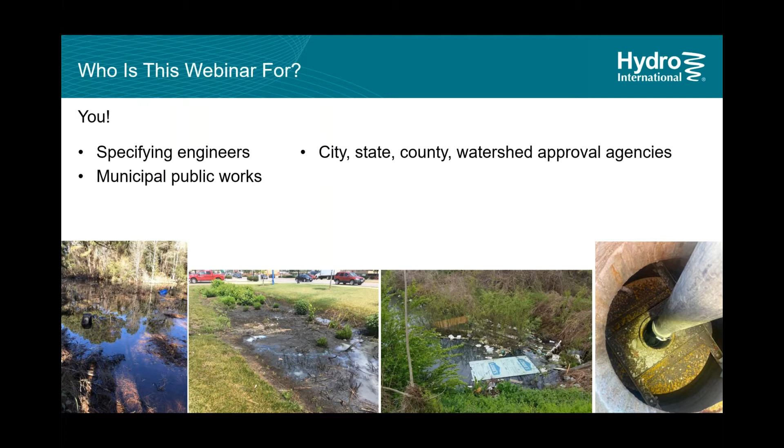So, who is this webinar for? You. If you've registered for this, this is for you. This is really a webinar intended for everyone, but more specifically, I think the people who will find the most value from this are specifying engineers, municipal public works folks, city, state, county, watershed approval agencies, or local engineers, but also business and property owners or managers could find some value out of this.

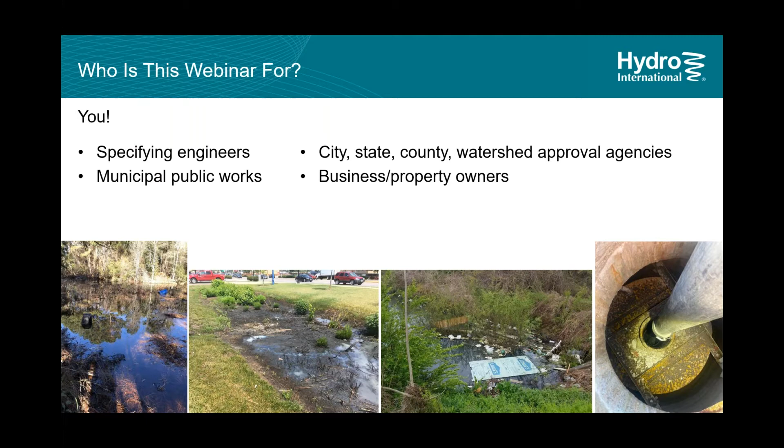And what I'm going to do here throughout the slides is show some photos of failed BMPs. So you can see here some ponds, bioretention, stormwater separator. Not all systems are failed, but since we see these things every day, I just want to share with you what we see out in the field, so you can get an idea of how these systems can end up looking if neglected. So those will be scattered throughout.

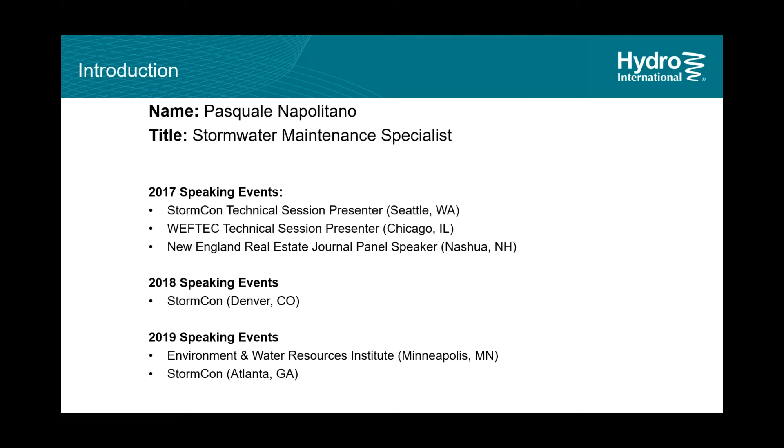As I mentioned, my name is Pasquale Napolitano. I've done a variation of a maintenance webinar probably for the last 5 years now. I've done some papers that also deviate off some of those main points in terms of where stormwater's headed or how things are looking within the compliance or inspection maintenance side of the stormwater industry. So if you've attended one of those sessions before, I'm going to try to change things up a little bit more this time. I want to keep things even more visual than usual. I feel we've all been cooped up for quite a while now, so I did want to keep things a little bit more visual in that sense. So you should see some new things, but also I'll be touching on some other key points from before.

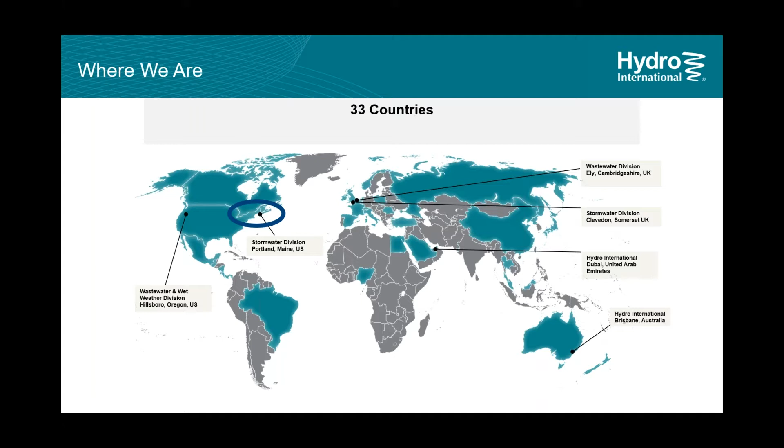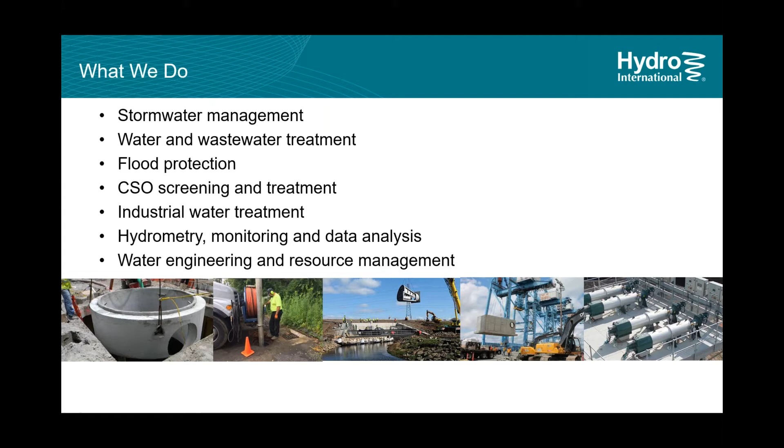As far as where we are, again, Hydro International, as the name suggests, is an international company. I'm in the Portland, Maine office. That's our stormwater headquarters for North America. We have folks all over the country, the continent, of course. What do we do? Real quick, if it's related to water, we do it. Wastewater, stormwater, CSO, pretty much everything industrial water, either on the process water side or surface water side, flood management.

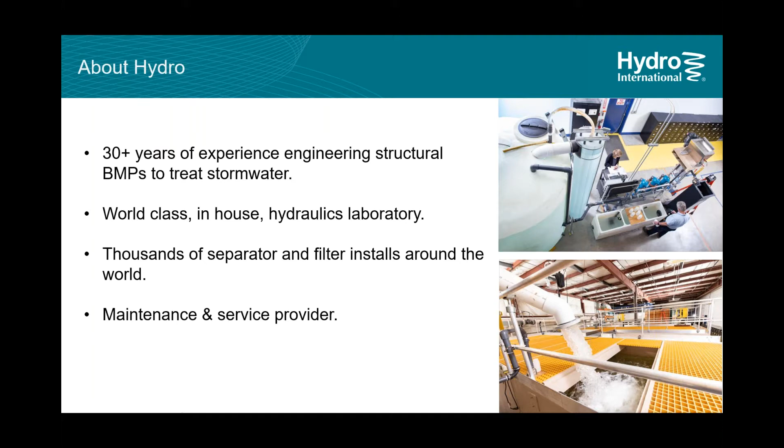Specific to the Portland office or America's stormwater, it's been around for about 30 plus years. We manufacture BMPs. We have an in-house lab where we do testing of that. We have thousands of separators and filters installed across the world. And again, a maintenance and service provider. So we not only develop, engineer and manufacture treatment and proprietary products in-house, we test them in-house. We also have them installed all over, and we also service these afterwards. So we're uniquely positioned in the sense that we're working with regulators, specifying engineers, contractors, business owners, all the players involved in a stormwater BMP's life.

So why are we talking about maintenance? Well, the truth is, and I don't think this is a surprise to anyone, the majority of stormwater BMPs don't receive routine inspection or maintenance. Leaning on the fact that we're a manufacturer, we can look at our own records, specifically for filters, because filters need to be replaced every so often, and we can see how often that is happening based on the installation base. It's less than 20% probably doing this regularly.

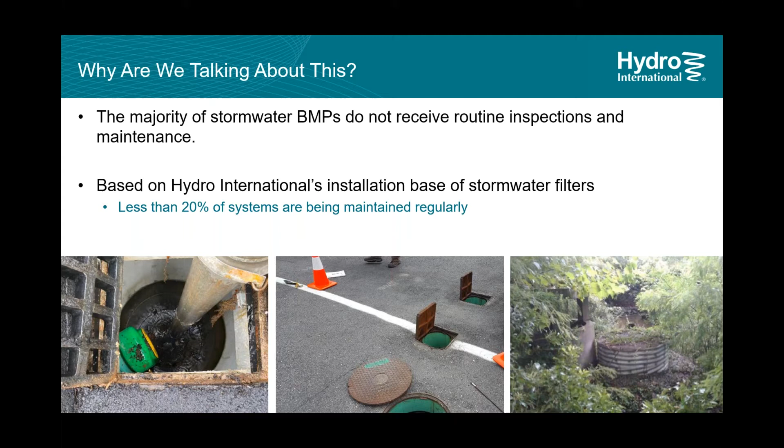I will say that over a 5-year period, that 20% wasn't always 20%, it was lower than that before. As much as I'd like to pat myself on the back for that, it's not necessarily the case. I think the industry as a whole has been moving towards this. In some of the later slides, I intend to show you what I see as some of the driving factors for awareness and gaining more compliance for stormwater inspections and maintenance. But again, 20% doesn't really cut it. We need more than that.

What's the result of having little to no compliance? Well, if stormwater BMPs are not inspected and maintained, the structures fail. It's really that simple. And again, some photos here included, a bioinfiltration system. You have some catch basins that are completely covered. You can't tell that they're there, or what's in there. And one of them has 7 feet of debris. This is not great. Not inspecting means that things go unnoticed.

So if you imagine all the work that goes into, if you are a municipal engineer, approving projects, if you're a specifying engineer, putting in the soil and erosion control measures, specifying the product for the treatment that's needed for the site, all that work, 12, 24 months later, if no one's doing anything, it's like there was nothing there, or worse, things can kind of get out of control.

So it's really important that best management practices are seen as an ongoing thing. These are not something that just gets installed and then it's done its job and you move on. Really, stormwater BMPs need to be something that's constantly being checked on and worked on.

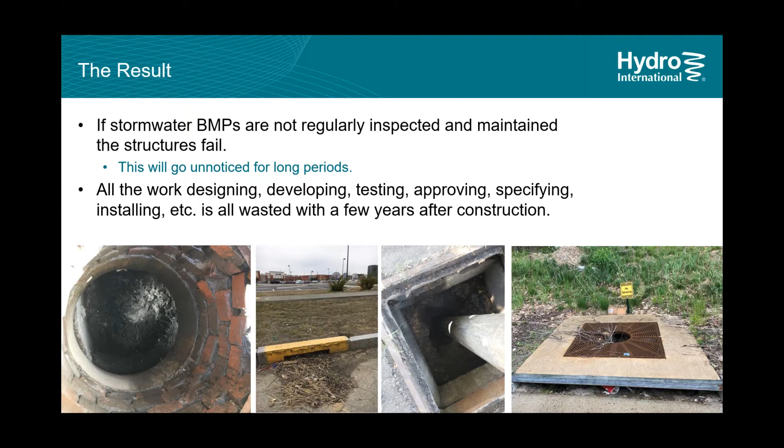Why does this happen? I've done a whole paper on this, so I won't touch on it a bunch here, but the gist of it is that there's a lot of players involved. Again, there's specifying engineers, there's approval agencies, and there are contractors, subcontractors, manufacturers involved. And in the end, maybe a developer sells the property, leases the property, properties change hands. It very quickly turns into a bad game of telephone.

And so basically the lack of awareness, and I guess lack of regulatory enforcement is unfair, but just the sense that a lot of emphasis gets put on permitting for new construction. And the same emphasis or resources aren't given often for the back end of that, which is sort of the regulatory enforcement to ensure that these systems are being maintained afterwards. But again, that big factor is communication.

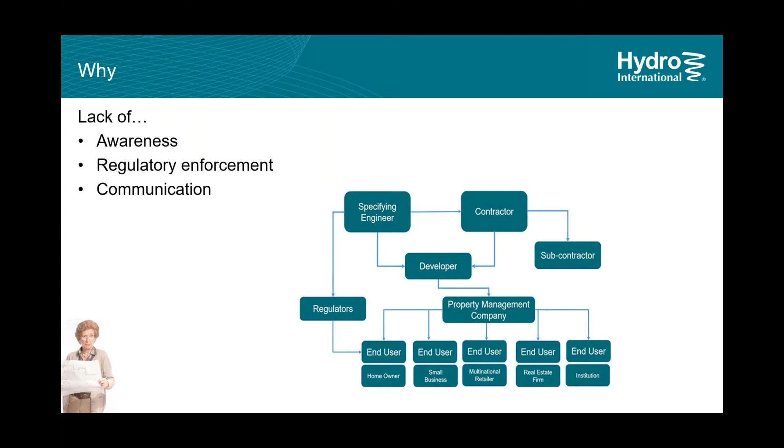And I put the little old lady here with the plans because it's funny, but it's true. I mean, I spent almost my entire morning this morning talking to homeowners and people who represented large box stores who didn't know they had something, trying to get it fixed. So it's very common for people not to know what's going on or to know how it happened or that they had anything.

To make matters worse, again, maybe a little bit harsh, but the EPA obviously has its regulations and they're vague, but not vague in a bad way. It's there to be interpreted so that local communities can then interpret how they need to. Rainfall in Nevada is not the same as rainfall in Florida. So it is intentional to an extent that there's room for interpretation how these should be implemented in various areas.

So that's not necessarily a bad thing in and of itself, but as this gets passed along, this all gets interpreted differently and people are taking different ways on how to do these; different Phase 2 municipalities are handling things differently. And so it can get really confusing and some things work and some things don't. And that sort of confusion just kind of perpetuates this issue of people not knowing what's going on, or the end user or property owner knowing what to do.

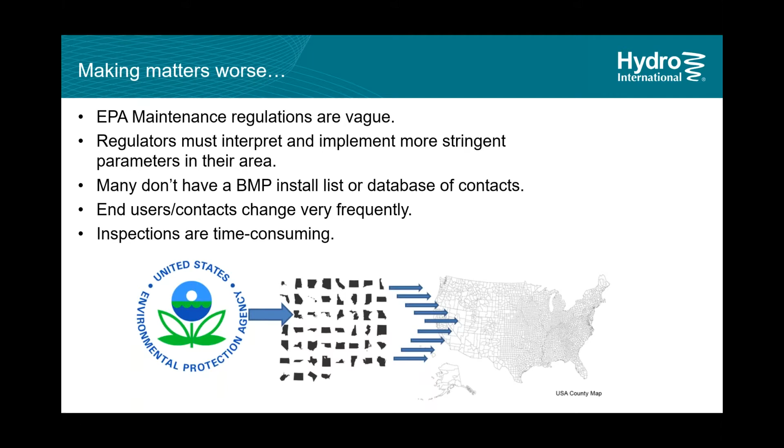Now, the rest of the presentation, as I mentioned, I wanted to be pretty visual about a lot of this. So I want to show you case studies of BMP maintenance in practice. And before I get into that, we do have a poll for the webinar that I wanted to run. I was just curious to see, out of the attendees, have you witnessed stormwater servicing or maintenance in person? It can be paving stones or catch basins or underground filter vaults or something as simple as bioretention or swales being mowed or trimmed. But we want to know, is this something that you've seen before or is it something that you don't get that hands-on with? So I'm going to attempt to run a poll here.

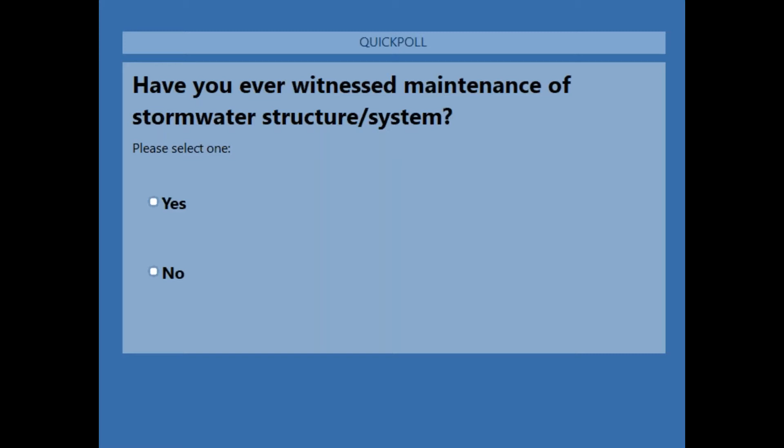Bear with me while I get it to start. So I'll just give everyone a little bit of time here to vote. Just give everyone a few more seconds. All right, let me see here. So I'll see if I can share the results with all of you.

So it looks like pretty evenly split. About 3/4 of everyone voted. More folks than not say that they have witnessed stormwater maintenance, which is good to hear because, again, stormwater BMPs can be a whole array of things. So it is good to hear that something as simple can be seen. Maybe not everyone's seen full-on confined space entry, underground filtration services, but if you've seen something, it's certainly better than nothing. So I'll close the poll now, and I'll jump through some of these case studies and really just walk through what happens. All right.

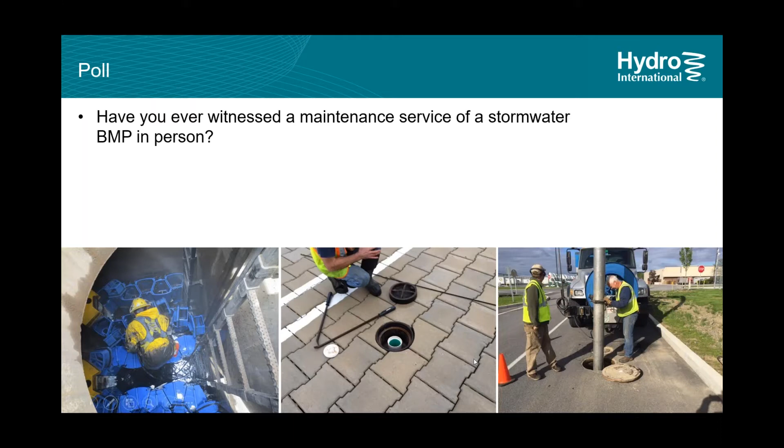So here we're going to get into maintenance case studies. Some photos here, just sort of your standard catch basin cleanings, some with more material than others. Typically, you're going to find sediment, dirt, sand, grit. You will find maybe dissolved organics, leaves, grass clippings, things like that. Trash. Those are the normal things you can expect to find, depending on the site use.

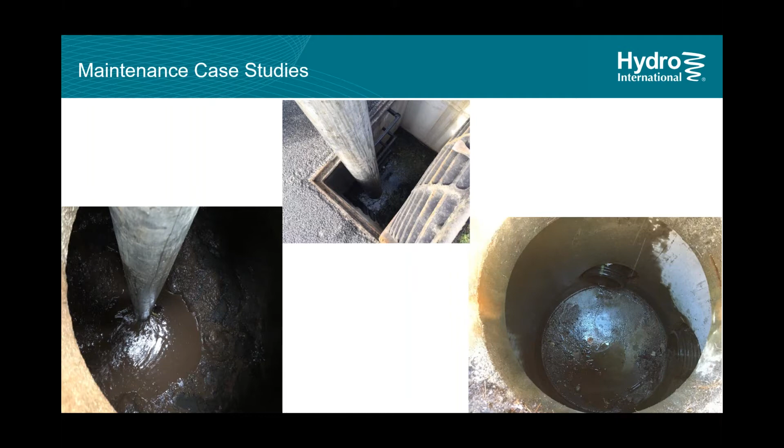If there's fueling, you may find some gasoline sheen, diesel, things like that, or you may find worse things. What I want to do, though, is take the more common stormwater BMPs, a little bit of gray, a little bit of green, some proprietary systems, taking examples from across the country, from Hawaii to New York, and just sort of give a range of what we typically see when we're doing something, and just walk you through it.

So maybe you have seen corrugated metal pipe detention cleanings. You've been on site for a CMP cleaning, but maybe you haven't actually been inside the chambers or in the rows and seen what happens. So that's what I want to show you. Again, you get your dirt, your silt, your trash, and leaves or mulch can get in there. And again, construction debris is a huge one.

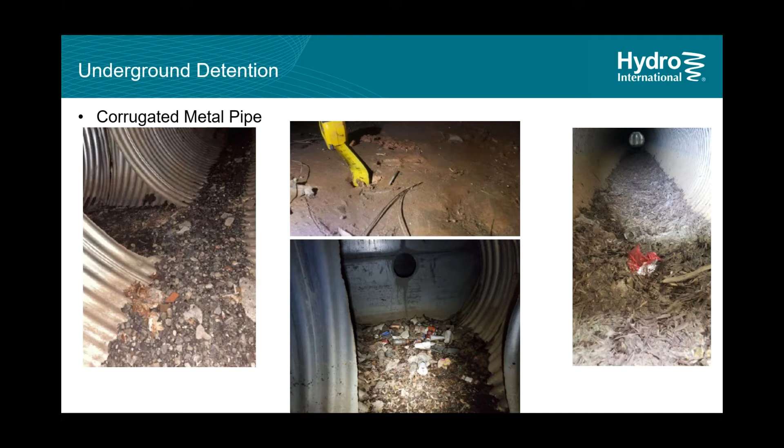Sites that have not the best erosion control measures, a lot of the stuff can get into the chambers and stay there. In the top photo there, you can see about 7 inches of silt in the CMP detention. So, how do we clean this? Well, you install maintenance manholes. Sometimes they're at a manifold at the end. Sometimes they're in the center to get down in there and clean them.

But what's important to note about actually maintaining underground detention, and it's not unique to CMP detention, is that it takes a lot of work. There's a good amount of manual labor in terms of pushing and shoveling material to where there's a maintenance access, then flushing and pumping, and doing a combination of power washing and pumping to get the material out. So it can be labor intensive. It can be time intensive as well.

But as you can see from the photos, these systems obviously can be cleaned. They work very well for what they get installed for. So they're great devices, but you just need to be cognizant of the fact that when these need to be cleaned, it costs money. And that's probably the biggest thing I encounter when speaking with property owners: it's not even on their radar. It's not on their budget that this is something they have to do.

And to explain that this needs to happen, and will need to happen in routine intervals, is something that if, as a stormwater community, we can get in front of, I think it helps compliance along.

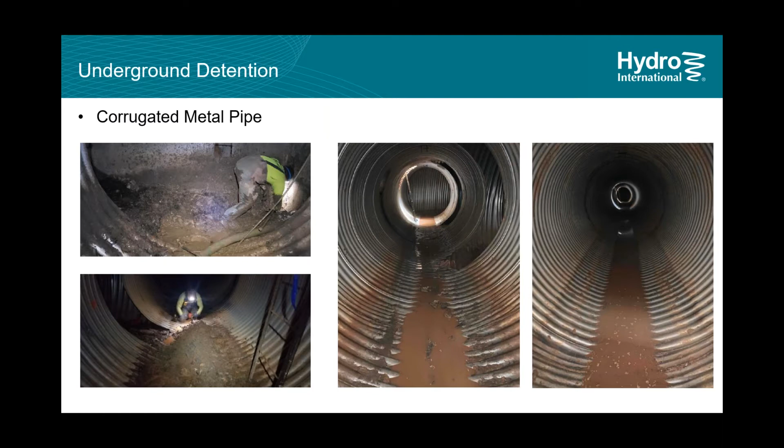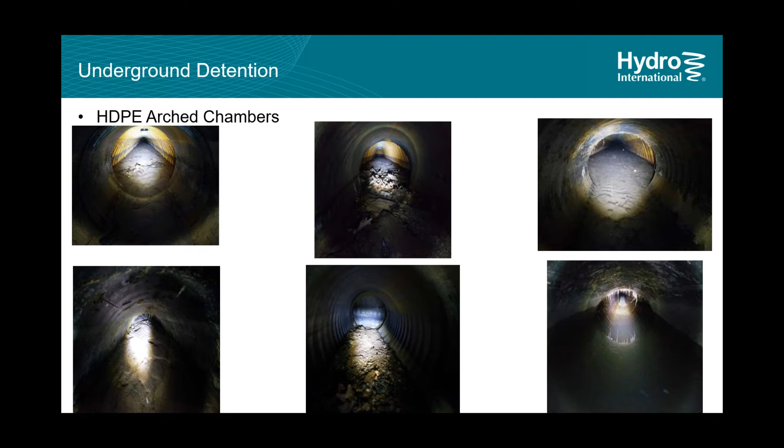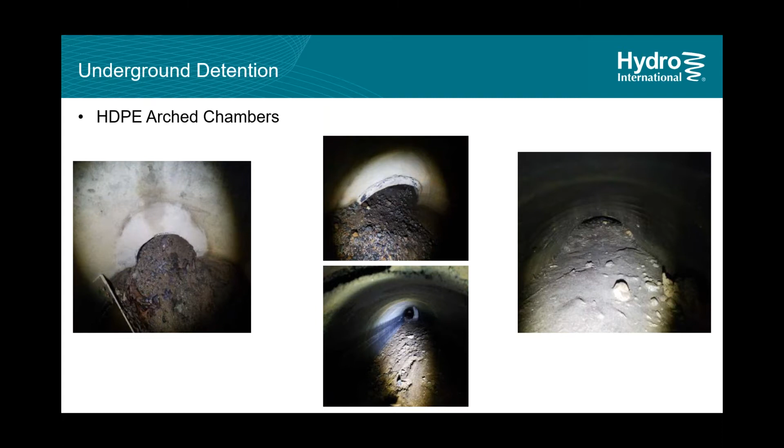Just a couple more examples of the same device that I just showed, those same rows. These are the access manholes, or some of them, that we had to get down into to see down the rows. And you can see they're just completely filled with material. So obviously the system's at this point failing or near failing.

But once you've jetted it and once you flush and you pump everything out, they're clean and they're operating again, and things are fine. So again, this is a common form of underground detention. It can certainly be cleaned, but you don't ever want to let it get as bad as the photos I just showed you.

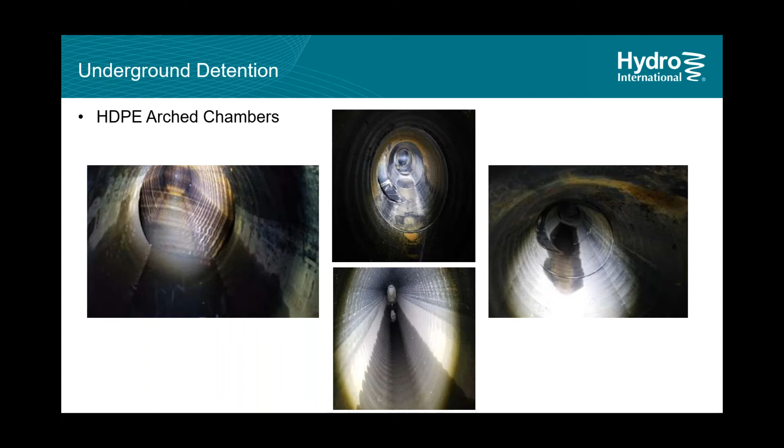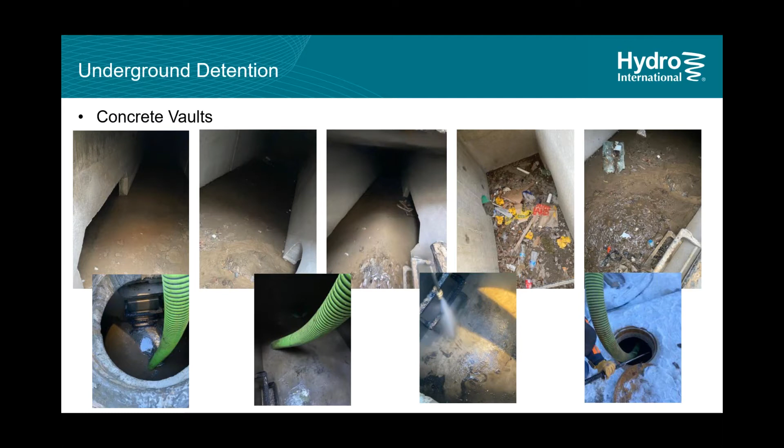But this is just to show you, your vacuum truck, power wash. If you need it, you can enter. If you don't need to, you can get it cleaned and have the system operating as it should.

I think in terms of proprietary devices, stormwater separators, hydrodynamic separators are probably some of the more popular ones. Certainly within the last 20 years, probably the most popular. You see some other devices now and approaches coming on the market, but these are the ones you see quite a bit by sheer volume of what's out there for stormwater BMPs. I would say stormwater separators, hydrodynamic separators are it.

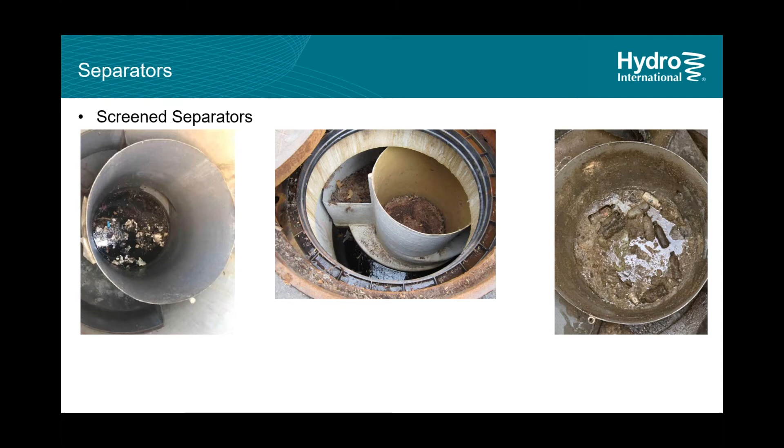These are some examples of some proprietary screened separators. See, they're doing the job, capturing leaves, trash. One example there has obviously been contaminated with cooking grease, not what it's intended for. But the key to point out is for any type of screened proprietary device, not necessarily particularly this one, but all of them, if you're not cleaning them or inspecting them often, those screens will blind. So though the screens are great, they're helping, if you're not looking at these, they will blind, and then the whole thing won't work.

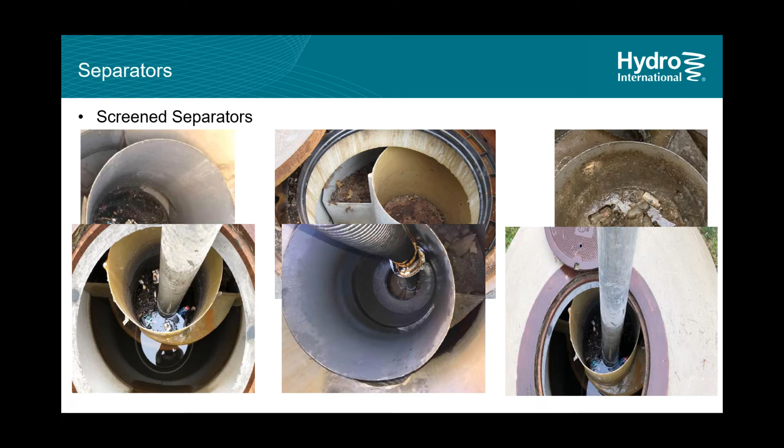Again, your vacuum truck, either a flexible hose or the standard size aluminum boom that comes down, you can clean these devices out and have them operating back to the way they should be. And again, just based on how many of these are installed, these are one of the more common things. So if you've seen a vacuum truck pumping, it's probably pumping a catch basin or a stormwater separator.

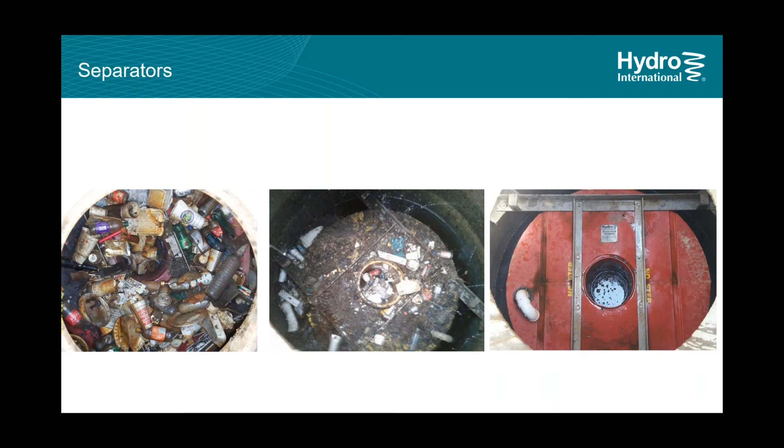Here's another model. This is a model that Hydro International manufactures. This is a Downstream Defender. We've been making this for some 30 years. And again, it's doing its job. Looks filthy. It's good because it's there and it's not downstream. Oils, trash, organic debris. They get into the system, and you need to get it out. Ideally, you never see it get this bad, though, right? So, yes, it's doing its job, but you want to avoid things getting to this point.

How do you clean it? It's really simple. Again, the vacuum truck, you drop down the standard size aluminum booms that go down, clean out the sump, clean out the floatable area. The structure is good to go.

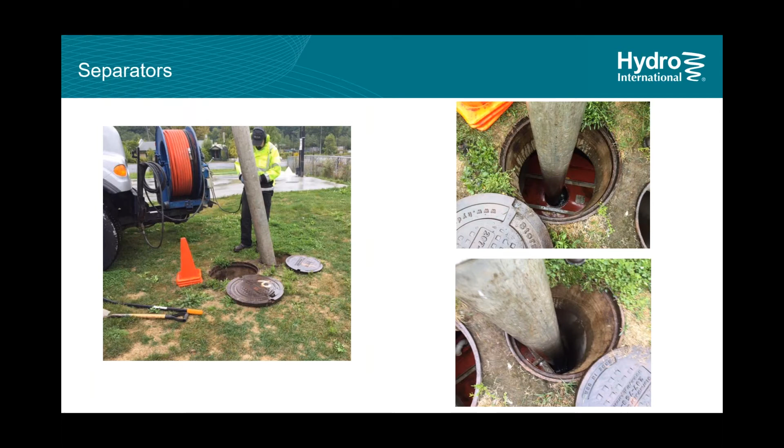A lot of stormwater separators kind of come in those standard precast manhole sizes, your 4, 6, 8, 10-foot diameters, even 12. More common in the last 5 or so years, you're starting to see 3, 5-foot variations of this. But round structures, separator inside it, these trucks can go and clean these out. For anyone who's used to doing this, it can be like clockwork.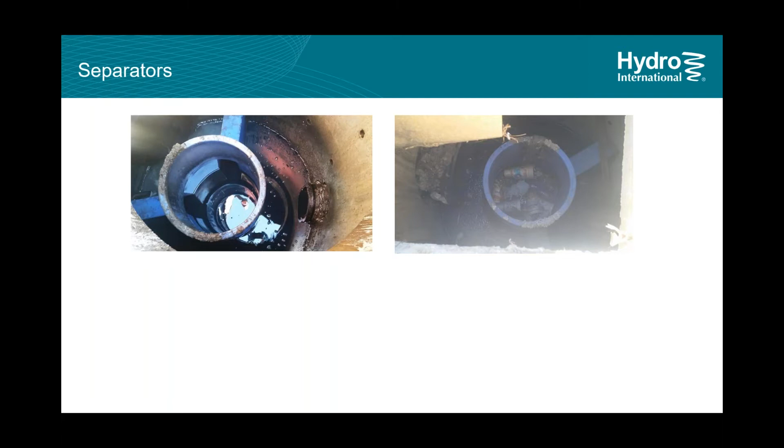And here's another model. This is a different model. Again, this is a Hydro International model. This is the First Defense, but the same idea. Here you have oil coming in, being trapped, not hitting the outfall, the outlet of the structure. Another example with trash inside there.

Same thing. Bring the truck, drop the boom, clean it out. What I will mention as well, universal to all stormwater separators, is just because you don't have a lot of, say, material on the sump floor doesn't mean you shouldn't clean it every so often, because by not cleaning it, a lot of that silt and dirt can get stuck there. You can almost create a false sump where you're starting to lose your storage volume because it's really hard to get out. So that's where the PSI power washer is really helpful in breaking that material out.

If you have a structure that's 18 feet down, that changes things. You can get a wand extension to help get down there, but in some cases, for some types of separators, you may have to enter it. And ideally, you never have to enter a separator. So preventative maintenance is way better than waiting until something gets completely full or 75% full, and then you're finding that it's very tricky to get the material out.

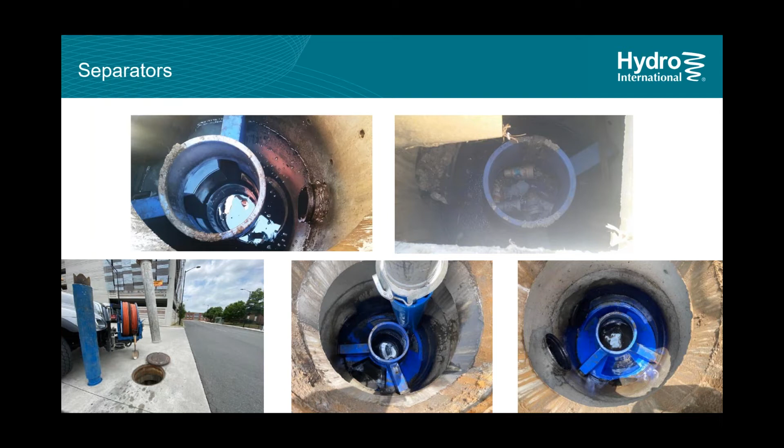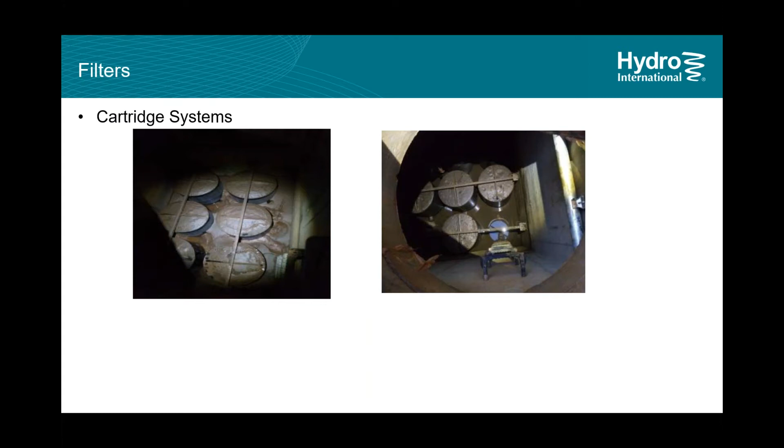Now I want to shift over to the other popular stormwater water quality option out there, which is filter systems. The first examples I'll give are cartridge systems, again with several variations of cartridge filters out in the market, doing different things depending on how they're designed. You can see the examples here. Obviously, they're ready for service. How do you service? Same way, you're going to power wash to get the material off. You're going to de-water, pump that out, dispose of it.

What's not shown in here, though, is the confined space entry that's involved to then undo the carts, have them hoisted mechanically out of the manhole, put new carts in. That's another side to filters that sometimes can get lost on the owners when it's being communicated, which is confined space entry. You need to purchase new replacements periodically, and it takes more people. Obviously, with confined space entry, you need an attendant, extra folks there. You need to enter in, it takes more time. So there are more costs associated with the filter just by nature of what it is.

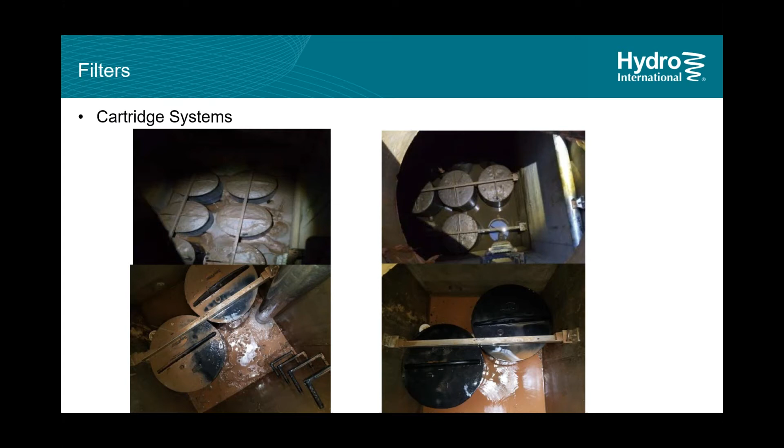But filters, by nature of what they are, can sometimes do a little bit more than what a separator can. So again, depending on what you need to use, filters are great. It's just setting the expectation with owners as to what this is after.

Here's a different model of cartridge filter. Similar idea, cleaning out the vaulted structure, the precast structure, getting the carts removed, vacuuming out the material right from the carts, power washing the carts off, exchanging the carts to be refurbished, and getting new carts on site. Same thing though, needing mechanical assistance to help lower and raise the carts in and out of the chamber. That's part of what's involved in this.

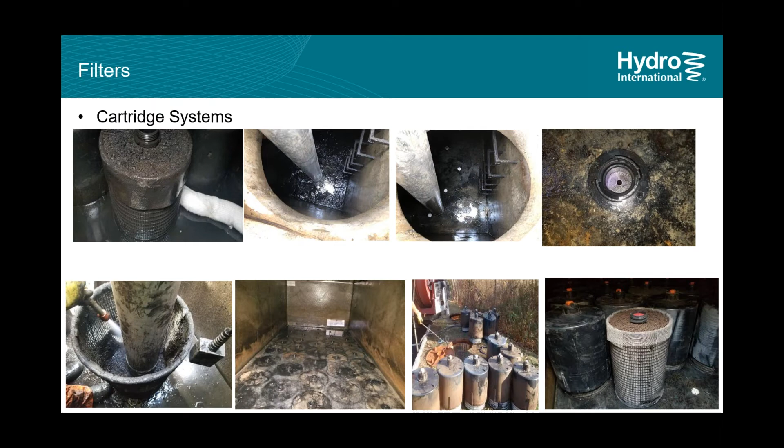Needing to coordinate, when are our new carts arriving? Are we going to have the carts out above grade, ready to take off and to put in? If it's a large mall, you have the space to do this. That's great. If it's not a large property, do we have space to have a bunch of carts out in the parking lot while we're doing this? So these are sorts of things you may want to consider. But again, here's the process to clean them. You power wash, vacuum, get inside, hoist things out, get things back in.

More recently, there's been a lot of membrane filters on the market. I'll just touch on one model here. There are several. Similarly, you're going to start to see the theme here. The vacuum truck will suck out the water and sediment. You'll need to power wash the inside. There are some different variations depending on the manufacturer as to how to best service a membrane filter. Some will suggest removing them from their housings, power washing them off, and putting them back in.

But ask questions: how feasible is that, or how long can you expect that to maintain? The power washer can be pretty powerful. Do you damage the filter from that, or what's the lifespan after you've done that a few times? Those are the sorts of questions you may want to ask. If you're doing it within the chamber, that means you're sending someone down into the structure. That's confined space entry. If you're bringing them above grade to do that, you still need to get someone down there to pull them above grade. And then if you're power washing it up on the surface, where's that water going? That's another thing you need to be concerned with.

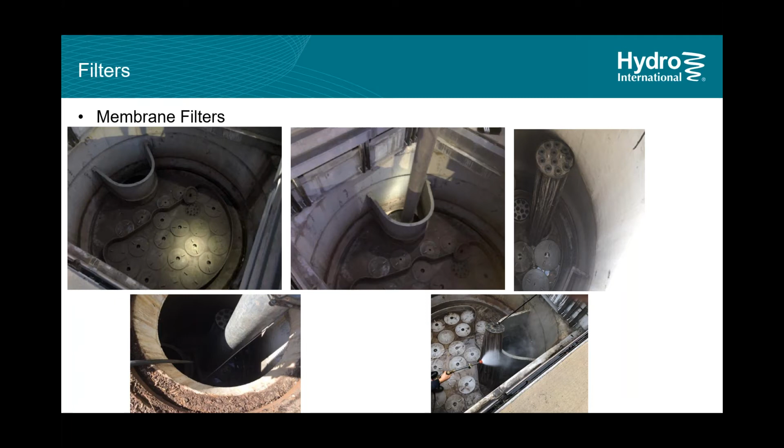And then of course, when the time is ready, changing the filters themselves out. So membrane filters, a variation on stormwater filtration, with some different things involved with them. They can be cleaned by anyone who knows what they're doing in that regard, but just be aware that there's a little bit more to it, or it's a little bit different than a cartridge filter or some other types of filters.

And the last example for a filter I'll give is media-based filters. These are Up-Flo Filters, Hydro International, and these are ones where a single person can hold these bags, take out the spent media, bring them above grade, and put new bags down into the structure. This is an example that's pretty versatile because it can fit into a 4-foot round manhole, but there are also variations of large vaulted structures similar to the other types I just showed you.

So same thing, you need someone down in there, you need to pump out, you need to power wash. The nice thing about this, similar to some of those carts, is that you can just vacuum up the material after. It's not hazardous, of course, provided there hasn't been a spill or something on site, so easy cleanup and being able to get in there. It's just a different animal from a cart filter. Again, you don't need that mechanical assistance. You do still need the vacuum truck with the power washer on it.

That hasn't changed. Provided the system isn't incredibly shallow, you are still going to need to have some confined space entry to some extent. So that's filters in general: confined space entry, vacuum truck, replacement filters. Those are things to keep in mind when you're looking at these. If you own them yourself, if you're a municipality, if you're a specifying engineer looking to install these for an owner, ask the questions: when does this need to be changed? How much does it cost? And how frequently should we be inspecting these?

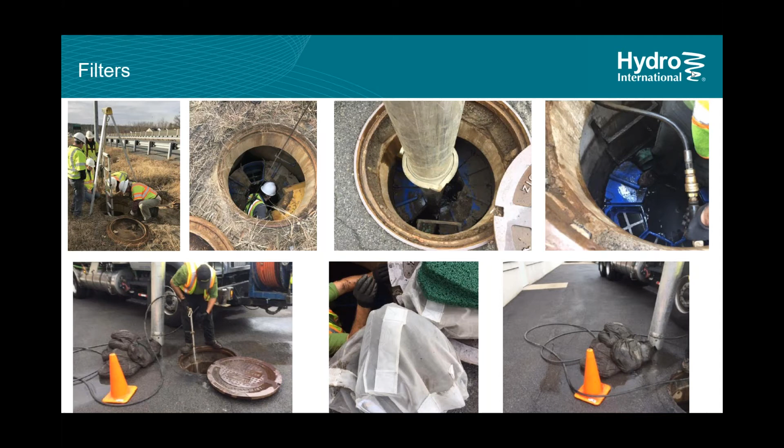Now, one that I get a lot of requests for more information on are stormwater ponds. So I will give a few examples of these. It's a little trickier to do ponds, of course, because there are different variations of green infrastructure or low impact developments for stormwater. There are ponds and swales, detention basins, etc. So I'm going to do some really broad brush strokes here, just give you a few examples of some sites we've done in the last year or so.

There is a lot of thought that if you can go green or do low impact, just by the name low impact, you're hoping you're not making a big impact. But keep in mind that without preventative or operational maintenance, the impact is actually much higher than it would be with a manufactured treatment device, where you have a confined space around a precast structure to hold pollutants or things that get out of control. With green, Mother Earth will do what she wants to do in some cases. So you need to be on top of that and have a routine schedule to inspect and do routine maintenance to avoid the corrective maintenance that can lead to things like this.

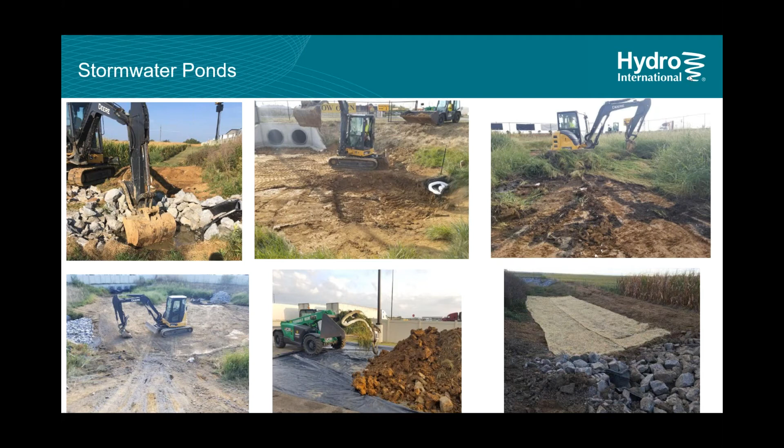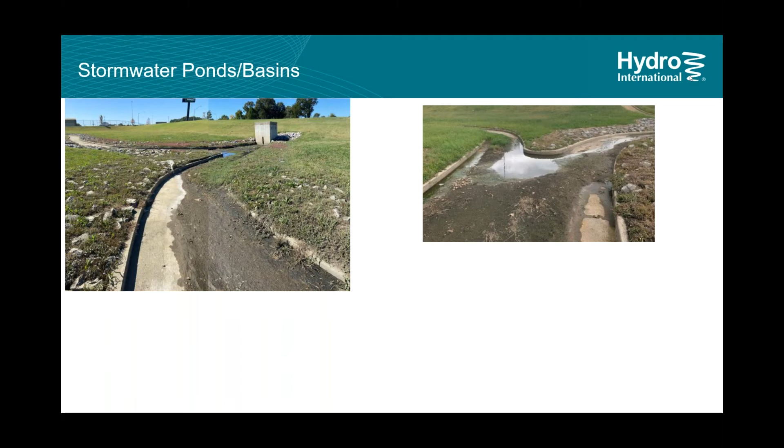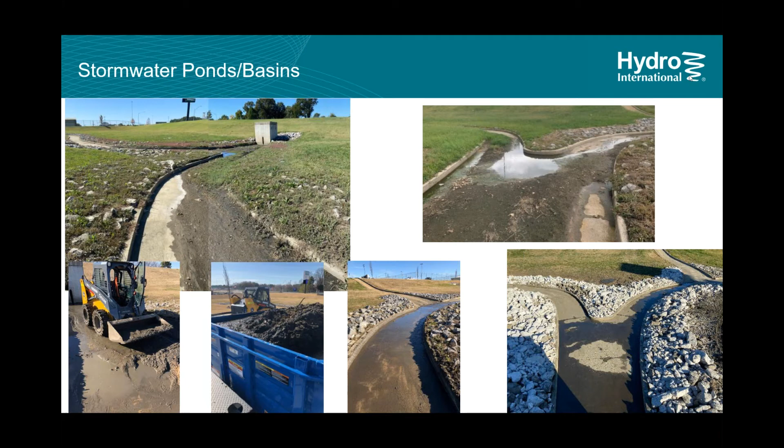So how do you fix that? Again, the concrete channel does help in the same sense as a manufactured treatment device, the gray does help confine things to an extent, but you also have to imagine if you have 300 square yards or more of earth to remove, then adding new riprap buffer and stones. It may take time, it may take more money, and it can certainly be done. These are just the sorts of things to keep in mind that can happen or will need to happen. Even on sites that are routinely inspected and relatively well maintained, if it can go wrong, it may go wrong. So be aware of that.

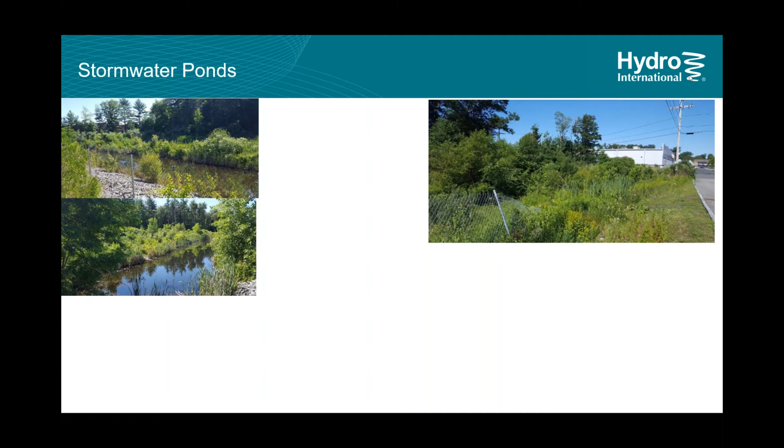And the last example, I believe the last example of ponds I'll give here, here's some stormwater ponds. It's sort of a mix of a wet drainage channel and a dry basin on the right, where you can't really tell it's a basin, right? It's completely overgrown. Saplings turned into trees and the pond sort of disappeared. The fence is falling down because they dumped snow there in the winter, which can be fine. But if you don't know that there was ever a pond there, that's a problem, right?

There are ways to try to help business owners or property owners as well, though. If there are saplings that have grown into decent sized caliper trees, and they're not interrupting the actual embankments or anything, well then, maybe you can keep those if they're not hurting anything. So there are ways around that. There's ways around trying to reuse the spoils and to chip spoils of wood onto parts of the property that don't turn into dissolved organic issues in wet ponds. But if you can have that part of the areas that get reseeded with grass, you can try to lower costs that way for owners. But it's all case by case basis.

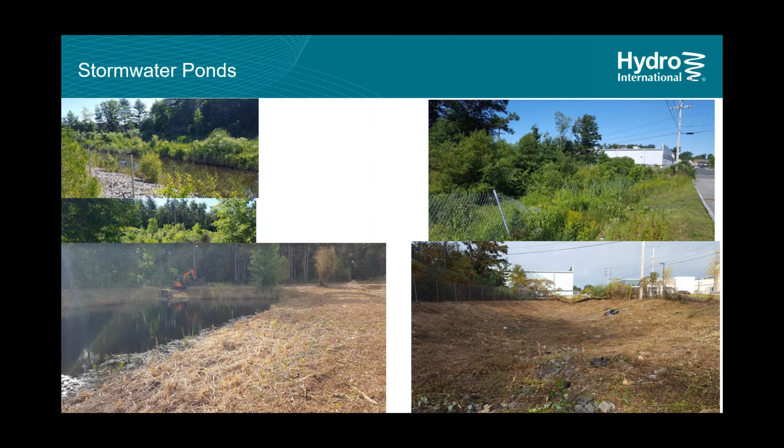Again, low impact development, it's way more variable than you would see with the manufactured treatment device. And that's just the nature of them. They all have their place, but just being aware of what the other side of that equation is really helps.

And this is the last example I'll give. And again, it's needing to flail the vegetation around the structure, reestablishing the embankments, reseeding. Again, it takes time. This particular example is behind a supermarket, so I know a lot of times there's talk about, well, low impact development, you can see it. It's above grade. It's not underground where it gets forgotten. Well, this was forgotten because it was behind the building and no one was going back there.

So that theory doesn't always hold, and so just having a routine plan in place really helps mitigate having to do this. You may have to do this at some point just by nature, every 10 years, maybe. It gets to this point, the embankments have sort of formed in a way where you need to just reset it. And that happens, but you don't want to be doing it every 2 years, right?

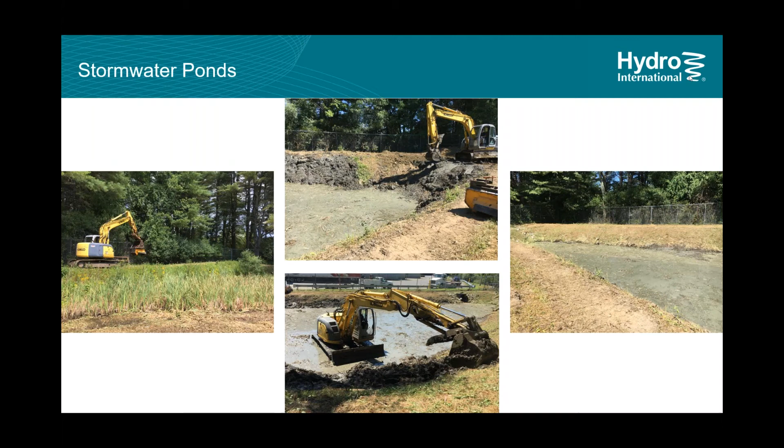Okay. So those are some examples and some case studies. Again, I just wanted to walk through some of that. If you know how that works, I apologize for having to listen to me drone on about it. If you haven't seen any of that in action, I hope that helps. Again, I think we've all been kind of cooped up, so being able to see photos of what's happening in the field, I hope that helps. Previous presentations, I've done a little bit more showing site plans and showing how it works specifically. I imagine a lot of you have been staring at site plans for 12 months and not photos like this. So I wanted to give you something new, so I hope I did.

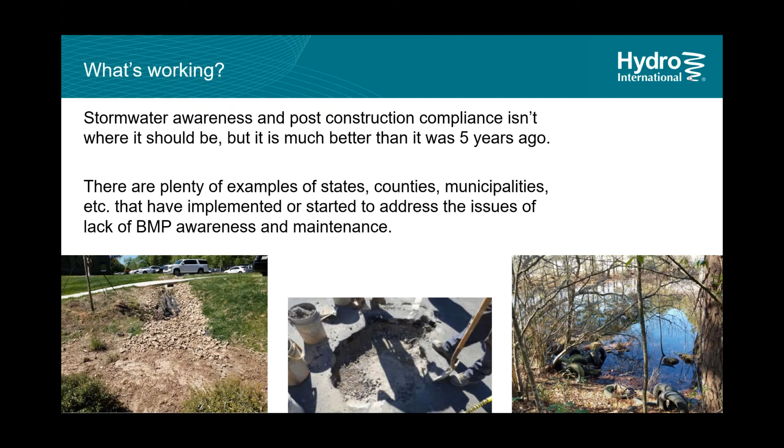But at the time of permitting, either for construction or certainly for occupancy, having something in place, something that binds the property owner, the county or the local authority, and even if you can, a maintenance provider or inspector, to work together to say, okay, for this period, we're responsible. We acknowledge responsibility for these structures. This is just one example.

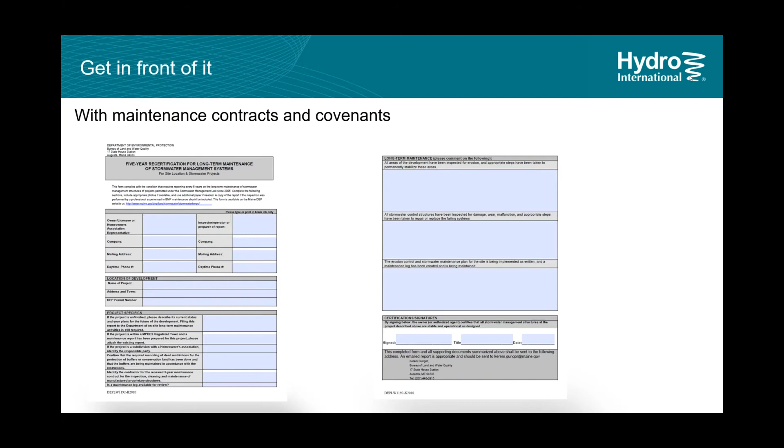There's lots out there, but I think this is the bare minimum you can do if you are a municipal or local government and you're trying to come to grips with how to get in front of this and start managing your stormwater BMPs that you don't own, but sort of your taxpayer base owns. This is sort of the bare minimum you can do.

A great example, I have shared this example before, but I love it, so I think it's perfect. Promulgate it, show it, state it. These are examples actually from New York. And you're seeing here, there's a sign saying there's a stormwater separator here, and it's protecting this lake. And it's not an obnoxious sign. I don't think it's ruining the local environment, but if you jog by this area, you're going to see, oh, there's something here, and this is doing something.

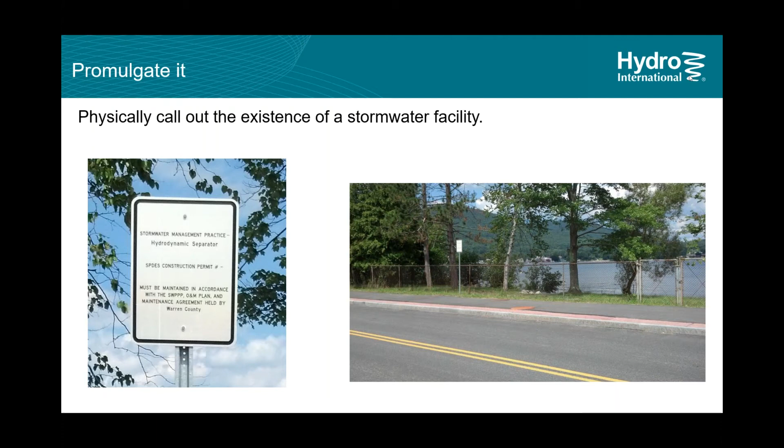This sort of thing is great. I wish we would see more of this. Again, I'm not a huge fan of just throwing signs everywhere, but doing it where it needs to be, I think, is a great idea. And to that point, here's some examples from engineering drawings showing exactly that. On the left, you have a stormwater hydrodynamic separator, proprietary device. On the right, you'll have a detention basin. But it's the same idea, putting a sign up saying, look, this is what's here. This is being called out on the civil drawings.

If you're a local municipality approving construction projects, this is a great thing to implement. If you're a specifying engineer, there's no one stopping you from doing this too. You may be doing your clients some favors in some cases because they may not know about it otherwise, unfortunately, after 2 years goes by from the project being started to completion.

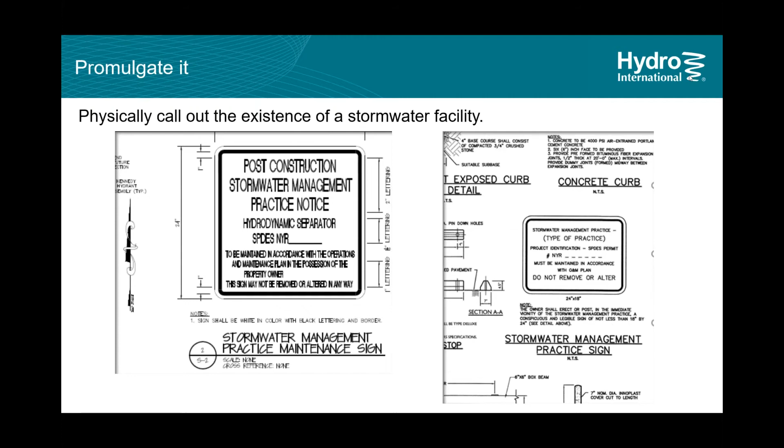But really, awareness and outreach are the big thing. This is another example I've given before. There are some really great examples of areas in the Pacific Northwest, parts of California, that have done a great job. Parts around Maryland, some counties around there as well, really doing a great job of showing what is stormwater. What's your responsibility? What do you have to do? The example I like giving, though, because I find myself on here quite a bit, is the St. Louis Metropolitan Sewer District, and it's their BMP toolbox.

And this toolbox is great because if you're a homeowner who has a rain garden or something and you've heard of stormwater, you pay a tax for it, but you don't know what it is, you can go here and learn more. If you're a specifying engineer and you need to know, if I put in this filter, is this going to cover the requirements? You can find that here. If you are a service provider for post-construction maintenance, and you need to know, does this proprietary device require confined space entry? Well, this website's going to tell you. It has everything for all audiences.

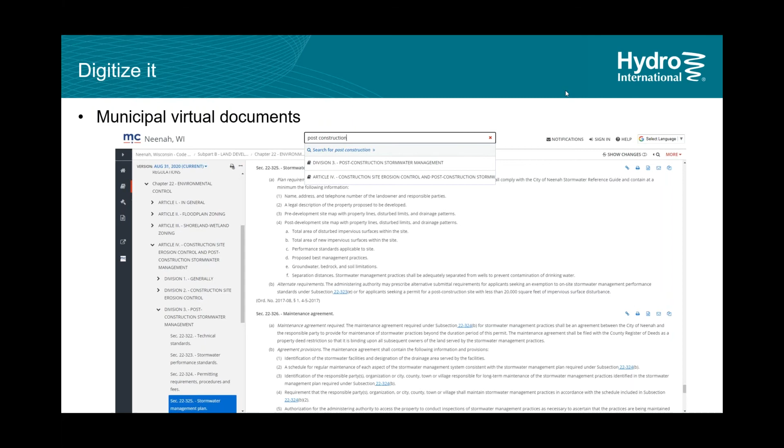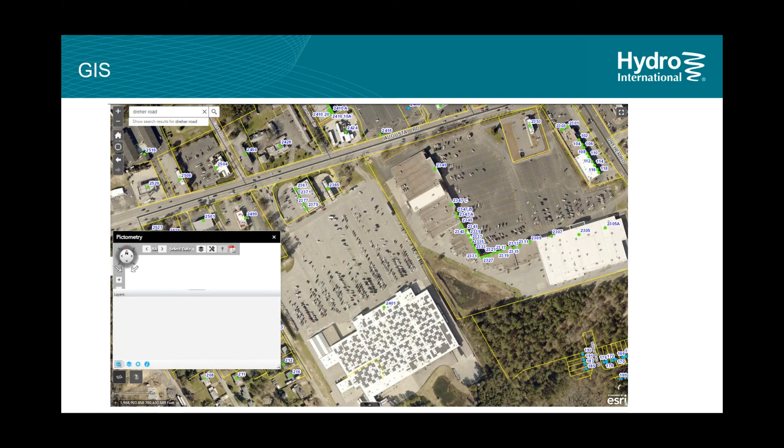And then the other thing that's happening a lot, again more so within the last 5 years, is GIS mapping, taking advantage of what we already have to show what's there and what's installed. I'll just go through quickly some examples: the different plots of properties are outlined, what's there, and you can click on that, type in the address, find what you need. These are all examples from all over the country as well.

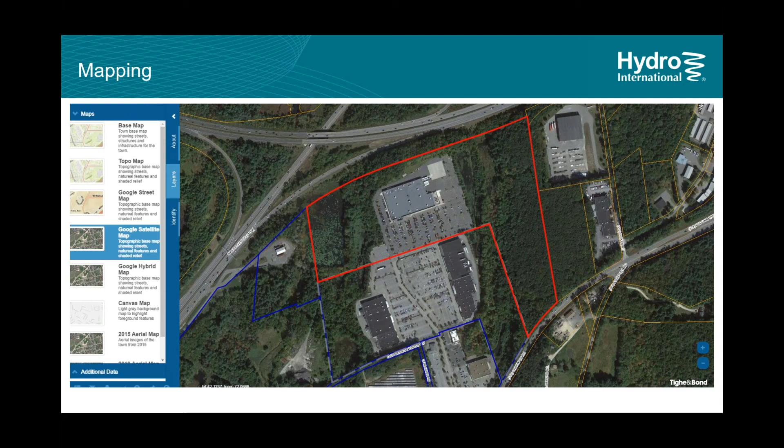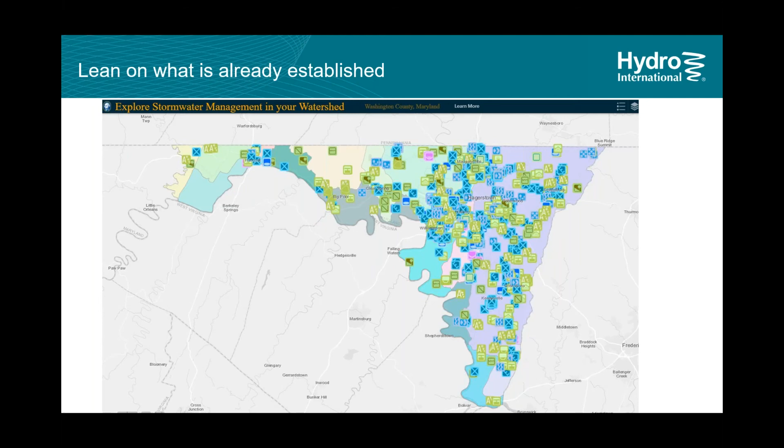Different properties, then you can identify, is this pond my responsibility, is it not, is it part of that property's responsibility? You can do it on the county level, the state level, the municipal level. Sometimes a lot of the information overlaps, but you can look in more than one place if you can't find what you need, and zoom in and drill through what you're looking for.

And this goes back to what I had mentioned before about the St. Louis BMP toolbox. This is a client we were working with who received an NOV but didn't know for what, because it was just given a BMP name. Well, we go on the website and check. You have impervious paving stones, a swale, a pond, what was the number? You can match it to the number and say, oh, what they're concerned about is your pond. So now you can start focusing in on what needs to be serviced by tools like this.

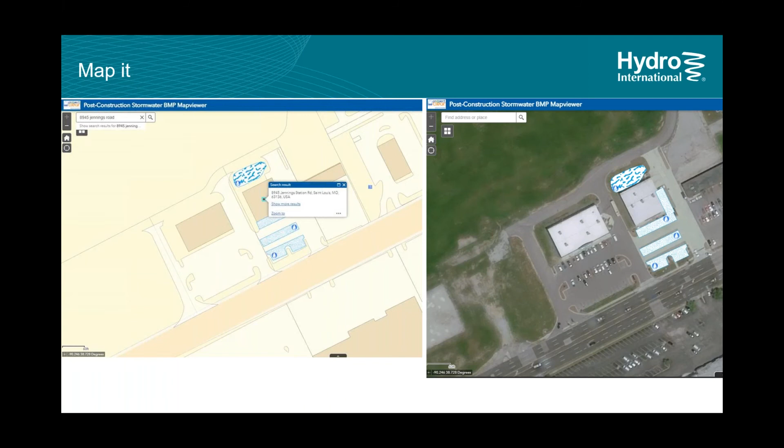So these tools are great. If you're not aware of them already, they're there, use them. And if you're someone who can help implement these in your area, I'd recommend looking into them. And then there's obviously third-party software that can really help maximize the benefits of this, where you can have reports done off of a smartphone, uploaded automatically, integrated into that GIS system, into those mapping systems.

And it's really great, especially for municipalities. It's a really great tool. There's a whole slew of these out there. There's been more popping up each year. Again, I think this is the way a lot of things are going to be moving towards in the future.

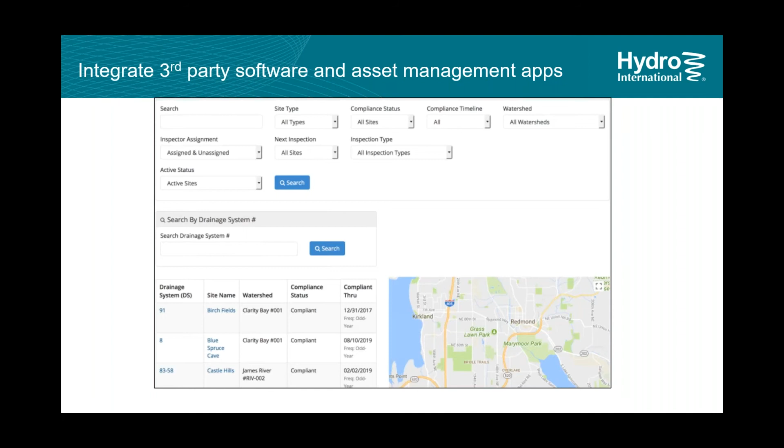We can't tell. It's so overgrown. But, oh, there was a pond here. Look, here was the last time it was maintained. Here's how it looks now. So now we know for sure there's a pond here.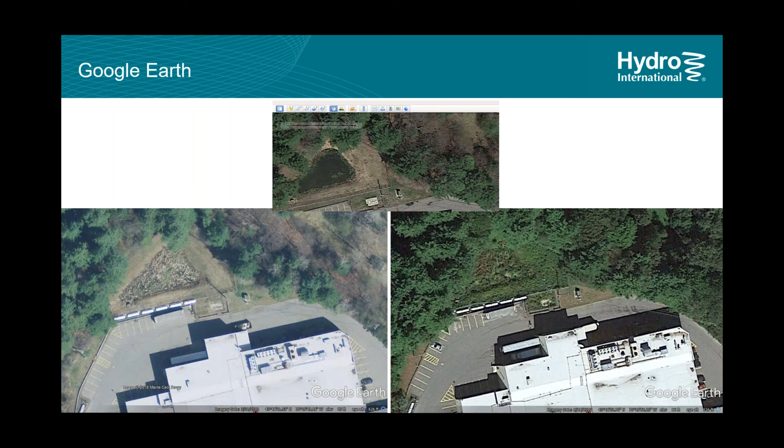And the curious thing about this one is that it's an 18-month interval between, and you can see how much already the pond is overgrown because there's just no routine maintenance happening to keep that cut back. But you can see when structures are being first built. You can see the life cycle, at least as far back as these things went. They usually go back to about the mid-90s. And you can see how a property progressed and if there were structures there, at least structures on the surface.

Hydro International, we've been doing some things. We're certainly not the only ones, but with data logging, water level sensoring, things like that. One of our colleagues here came up with a system where we could install a stainless sleeve and slide the logger into it. If it needs an antenna, there's one there that's ASTM rated. It can be driven over, and it's flat and it won't get in the way of things. Companies like East Jordan make special manhole covers that fit that in there so it can be flush. If you're worried about snowplows pulling one of those things off, it can be flush with the manhole lid.

We're using it in places like Honolulu, where you're trying to say, well, is the tidal influx affecting things? Is it backwashing into structures? Or in other instances, we're using them to see how the filters are operating, whether with water levels the filters are activating, are things going to bypass, and then crossing that with NOAA data to say, well, there was a huge storm event that was unusual at that period.

We know that. That helps, especially multi-sector general permit holders when reporting, to say, look, this was the storm, and this is when we sampled, and nothing was designed to handle that. Or we know our media is spent because we can see that the drain down rates are getting slower and slower. So things like this will also be something I expect to see more of in the future.

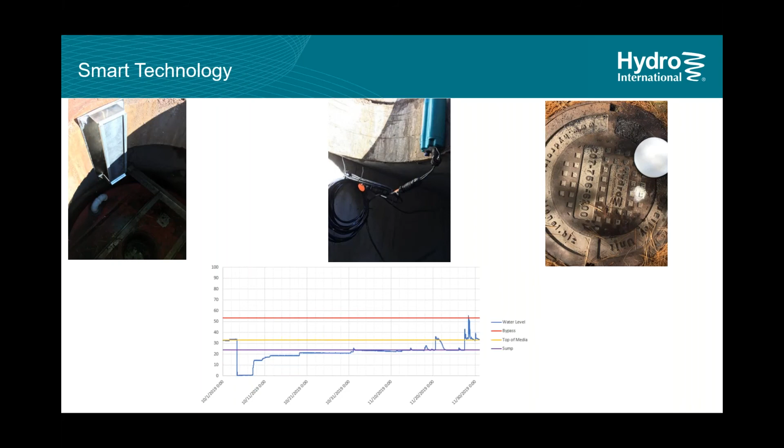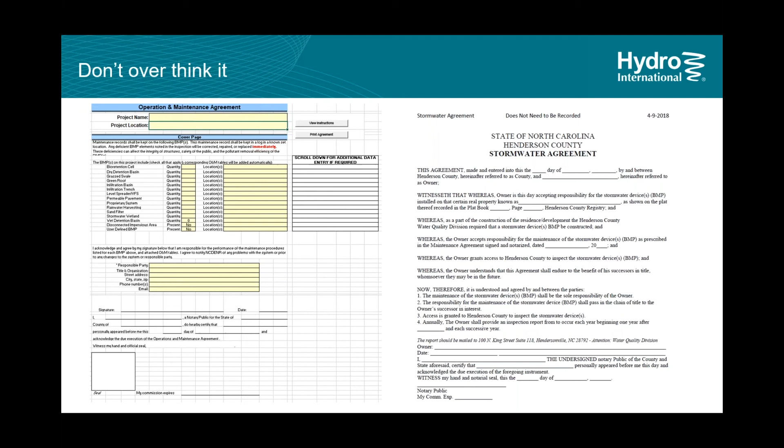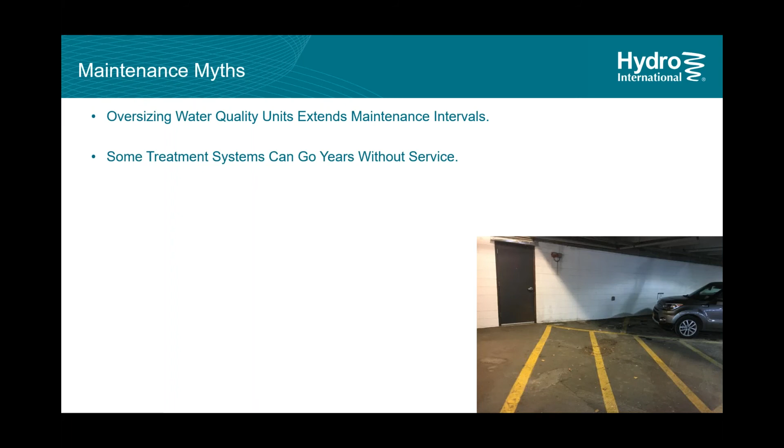I do just want to mention there's a downloadable packet on here. There are a few handouts. One of them is maintenance myths. I did a previous webinar on that, so if you want to download it, it's really great. It talks a little bit about oversizing units to extend maintenance. Not necessarily the case. Some treatment systems going years without service. Not necessarily the case. Self-cleaning systems don't need to be maintained. Again, these are myths. So I talk about these a little bit more and explain why those conclusions are drawn and if they're valid or not. Usually they're not flat out lies. They just need a couple more questions asked.

But some myths: not needing new media for certain types of filters, low impact development being more cost effective. Yes and no. If you're maintaining this routinely, maybe. If you're not maintaining a pond at all, and then in 3 years you need to bring in excavators, well, it's actually not more cost effective. So again, there are qualifiers on a lot of these myths, but that's a downloadable packet that I suggest checking out. And if you have follow-up questions, you can contact me after. I'm happy to go over them.

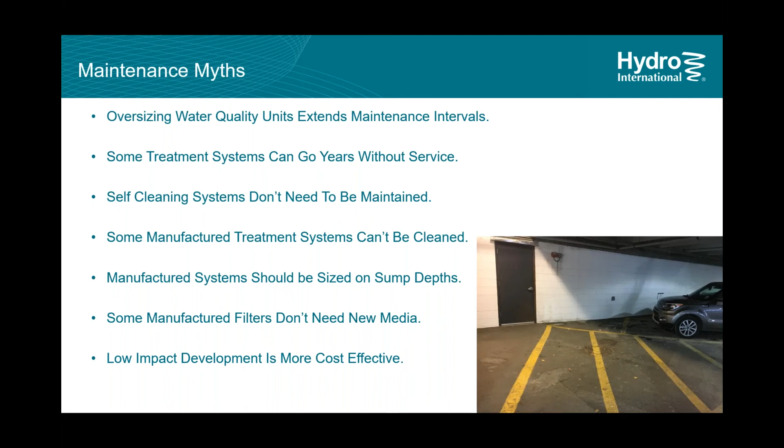There is no magic answer here. The only way to really know whether a system can go X amount of time without needing maintenance, or without needing a new filter, or whatever: anyone who tells you, yes, it can go this long without needing new media, it can go this long before needing to be vacuumed, no one knows. Anyone who's telling you that is not telling you the truth.

That's just not the case. The only way to know is to inspect. That's it. There's no other way. So routine inspections will tell you how your system is progressing. And then you won't be surprised if something's failed. You can see things on the horizon, and you can intercept and get in front of these things and mitigate large costs moving forward by having routine preventative maintenance every so often.

The example I gave here was actually a local one. One of our units was installed some 12 years ago, and clearly no one had been inspecting it. As a result, we could not get the manhole lids off. We tried using the torch, jackhammer, everything. We eventually had to cut out the frame and put in a new frame. The unit itself wasn't damaged. It was full of material, but it wasn't damaged. But if you can't get the manhole lid off, that probably means you're not opening the manhole lid often enough.

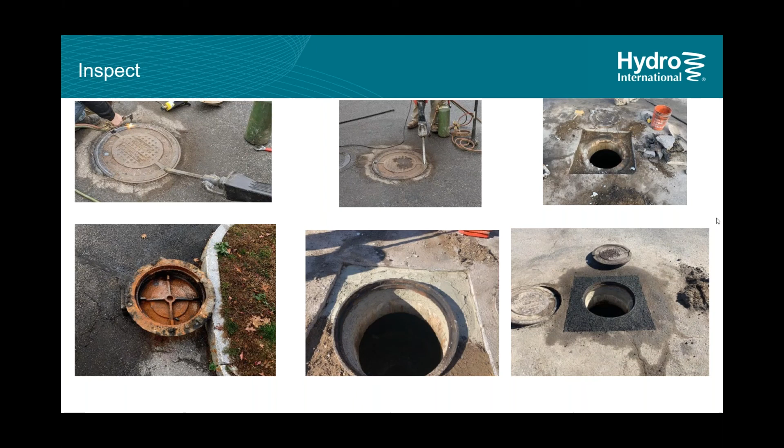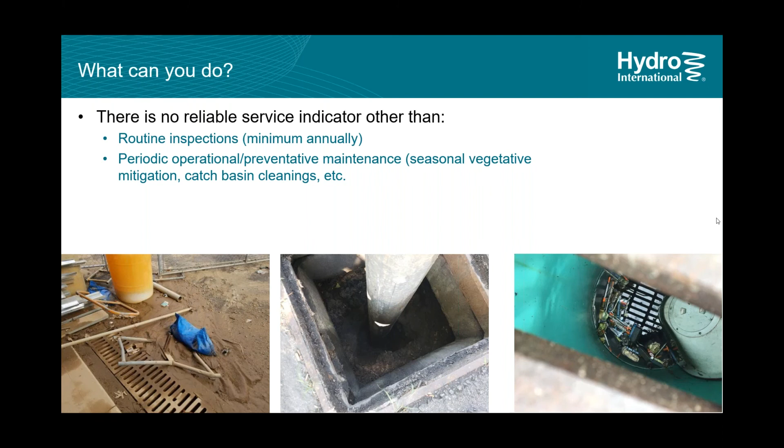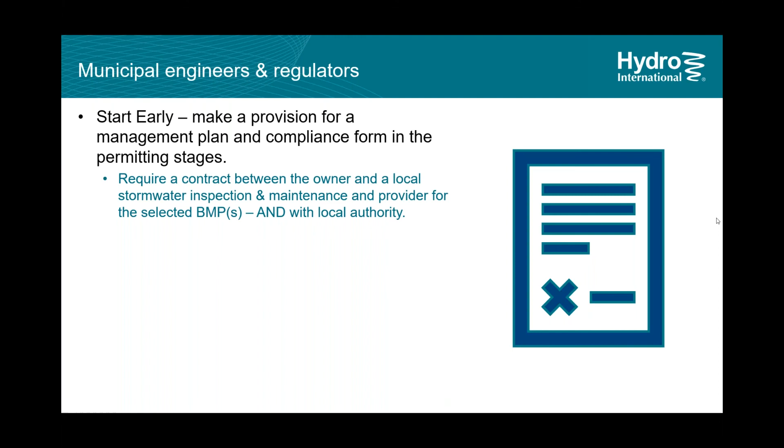Again, in closing, if you're a municipal engineer or regulator, plan to start early, getting some sort of plan in place in front of owners. A compliance form of some form is the bare minimum. Requiring a contract between the owner and yourselves, the local authority, for the respective BMPs is key. Decide, is this something that needs a third-party inspection program? You don't want to gatekeep the owners from doing things they can. You want to empower the owners.

But if you have a filtration system, you can't expect an owner to be going down into the manhole and inspecting, is this filter working? So when they send in a random photo of the manhole lid removed and a form saying we did this, be aware that there's no way you did this yourself, because someone needs to get in there and look at this media and see if it is holding up. So use better judgment. Do we want to gatekeep people out of certain things? Rain gardens, maybe an owner can handle. Filters, detention, probably not. But again, I would say the minimum inspection requirements are key.

A lot of places do an annual minimum. The problem, though, is that local authorities or enforcement agencies do not have the resources to follow up on those annually. So they follow up every 2, 3, 5 years, do spot audits around counties or areas. But what are you going to do when someone hasn't done it for 3 or 4 years? Their system may have failed, and now they're looking at a lot of corrective maintenance. Slapping them on the wrist with a fine doesn't necessarily help that at all. The damage is already done, really.

So really staying on top of that and using some of the technology that's available to keep track of that is really key. Moving things off of physical paper and spreadsheets and onto some of these types of software that are becoming more easily available and economic is huge.

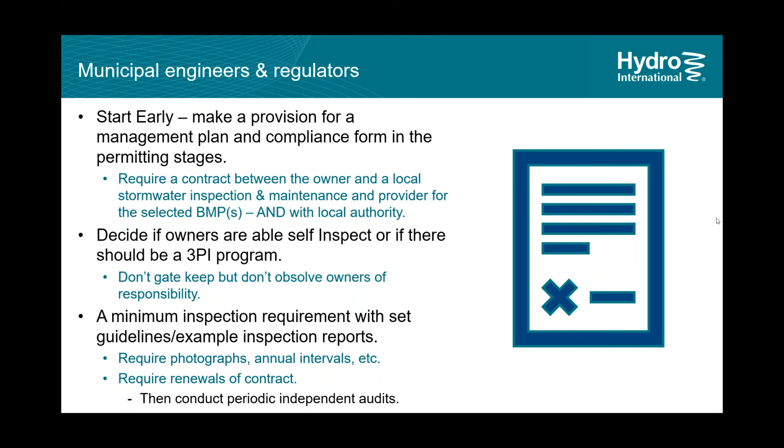If you're a specifying engineer, be specific, ask questions. The BMPs that I'm looking at, are these approved? If these are approved by WDOE, NJCAT, these types of agencies, you can rest assured that they can be cleaned. They work because they've been approved in the field, in the lab, etc. These manufacturers have spent a lot of money and time making sure these systems work right. And to that point, ask the manufacturer for a service estimate.

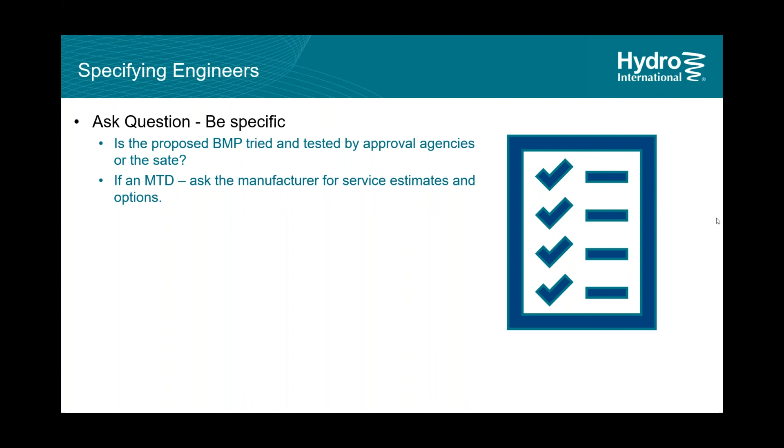It's not reasonable to get an exact price during the proposal phase for a project, but you should be able to get a ballpark and an idea of what things are going to look like. If the manufacturer doesn't do that themselves, they should have someone easily available right away, someone they work with who can offer you that or give you a budget for that.

And as I mentioned before, can this be operationally maintained? Are we putting this inside a parking garage where we can't get a truck in there and we can't clean it? Things like that. Yes, it's cheaper to do a low impact development here, but is it really cheaper in the long run?

And again, who's responsible for this post-construction? Is this a developer who's going to sell the property, so he signs the paperwork for the county, it changes hands, and people don't know about it? Is it being leased? Then the owner and the tenant argue about it. Trust me, I've seen it. Who's responsible? And really, is there a legitimate inspection and service plan in place?

Again, with the stormwater management plans and the SWPPPs, there'll be charts and tables saying weekly, monthly, quarterly, yearly things that need to be done. But don't just check the box. Ask, do you really have a plan in place? It's going to help you.

Because once you're done with the job, the last thing you want is the owner coming back later and saying, hey, I have these problems, I don't know what's going on, your name's on the title block, can you help me? You want to know that they're up and running on their own. So putting in a little bit of extra effort earlier saves a headache for everyone.

And again, if you are an engineering firm and you feel that you can do inspections, especially on sites that you've designed yourself, do that, but then team up with a company that does actual maintenance with trucks and equipment, so when it needs that, you can team up with them.

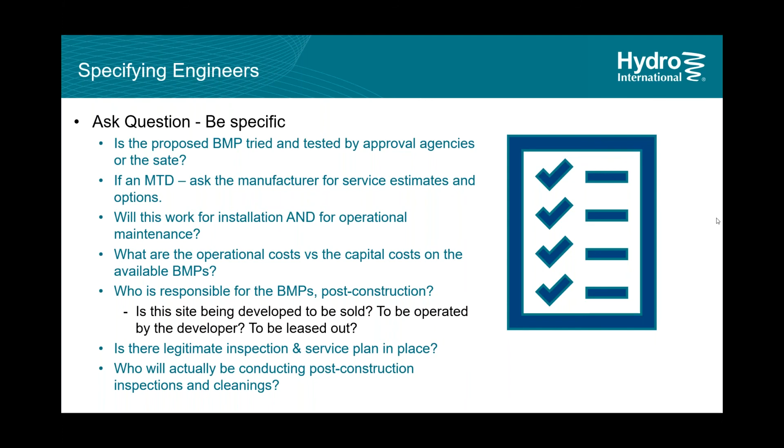A lot of businesses have had hard times this last year. We certainly saw that with a lot of people we work with. But it still rained, so these things still need to be cleaned. And if anything, with severe weather like we've seen recently, you could throw a dart at the map and pick an area that's had it. That just shows how much more we need to be on top of this.

So as that becomes the forefront of people's minds, if we stay on this message of stormwater inspections, maintenance and compliance, that will rise up with it. And I confidently believe within 5 years from now, in 2026, we're going to be looking back saying things got even better than they were in 2020, 2021. More people know about it. There's more compliance. Not where it needs to be, but we're on the right track.